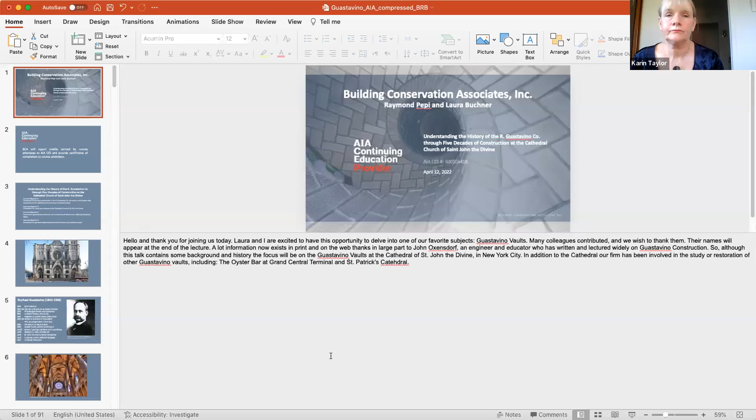Laura and I are excited to have this opportunity to delve into one of our favorite subjects, Guastavino vaults. Many colleagues have contributed to our knowledge over the years, and we wish to thank them, first of all. Their names will appear at the end of the lecture. A lot of information now exists in print and on the web, thanks in large part to John Ochsendorf, an engineer and educator who has written and lectured widely on Guastavino construction.

So although this talk contains some background and history, the focus will be on the Guastavino vaults at the Cathedral of St. John the Divine in New York City. In addition to the cathedral, our firm has been involved in the study or restoration of other Guastavino vaults, including the Oyster Bar at Grand Central Terminal and St. Patrick's Cathedral.

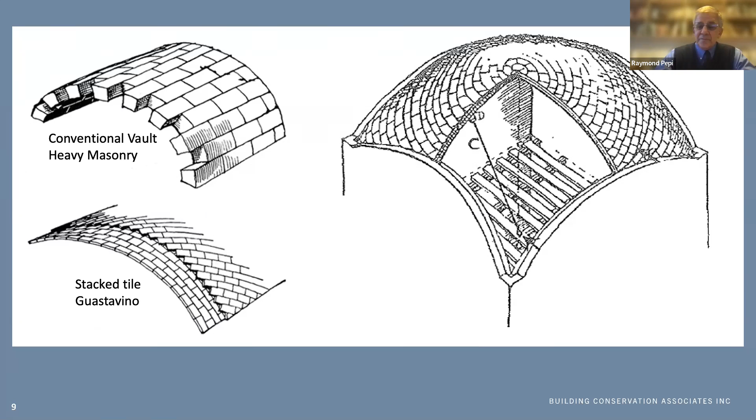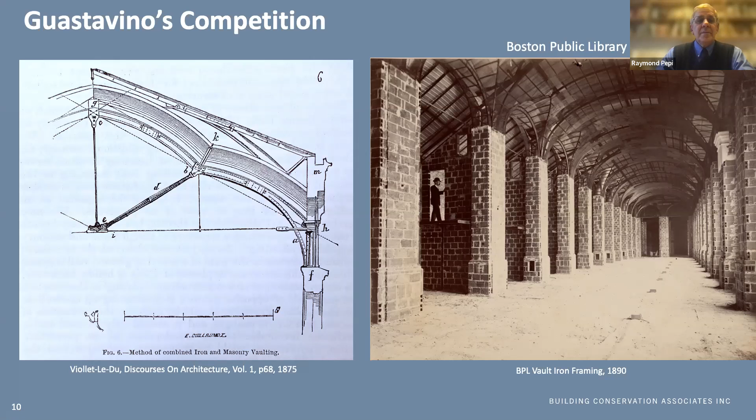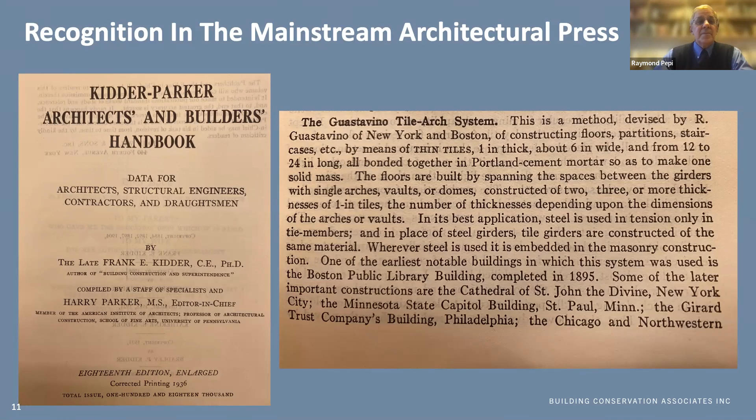By the 1930s, the Guastavino tile arch system was recognized in the mainstream press for all its advantages. This blurb in the fireproof chapter of Kidder Parker basically recommends contacting the Guastavino company, acknowledging it as the sole source of Guastavino vaults. In the same chapter, Kidder Parker provides other composite systems, steel and terracotta or brick for floor arches, but does not mention Guastavino's potential for domes or circular vaults of all sizes and shapes. The age of steel and concrete were overwhelming Guastavino's quaint tile system already in the 1930s.

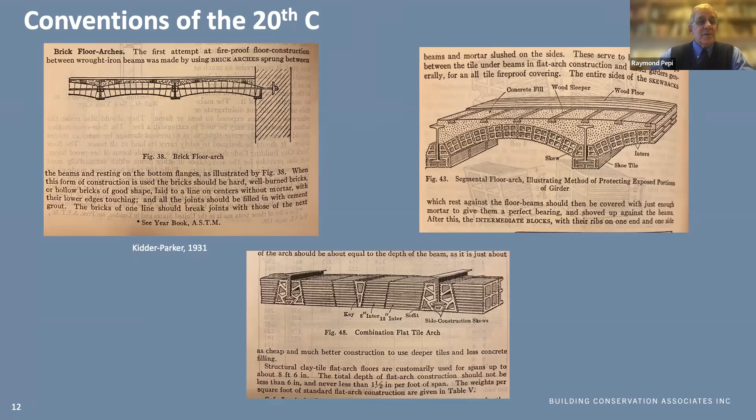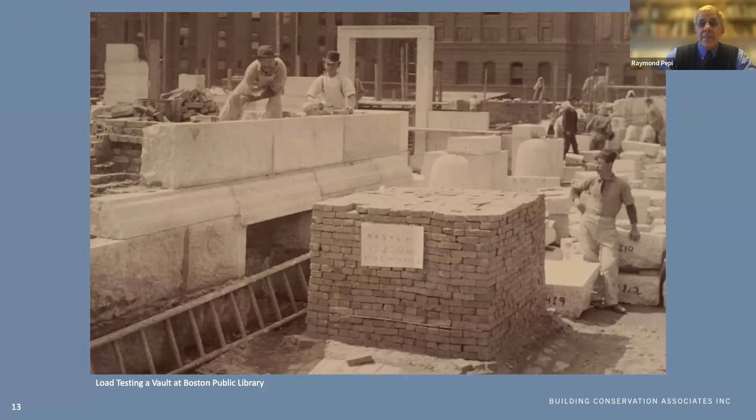Until the Boston Public Library Commission, all of Guastavino's vaults were plastered over and painted on the underside. Here at BPL, for the first time, he developed a system for decorating the exposed soffits of the vaults using glazed and unglazed tile in geometric patterns. He worked a lot of this out with the architect, but it was a very successful enterprise. Reflecting the importance of fire protection, the company was incorporated as the Guastavino Fireproof Construction Company.

Rafael Sr. gained increased attention and notoriety when he presented the first of two lectures at MIT, and his second was in early 1890. These were later published as a monograph in 1892 called Essay on the Theory and History of Cohesive Construction, a term that he employed. By 1892, the company had opened offices in New York, Boston, Providence, and Chicago.

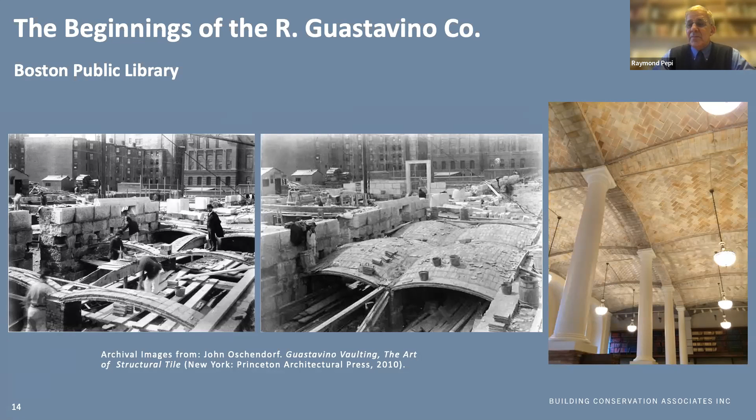Guastavino was becoming closely associated with the City Beautiful movement in Beaux-Arts architecture and architects. Due to the 1893 economic depression, the company was forced to reorganize, and in 1897 it became the R. Guastavino Company, with Rafael Jr. named as vice president, as he was gaining vast experience and capability. In the early 1900s, his dad, Rafael Sr., went into semi-retirement, and Jr. took over operation of the firm and did very well with it, equally as important as his father.

Although Guastavino's tiles could be installed without centering, it's clear from this photo at the Boston Public Library that sections were temporarily supported with wood templates. Perhaps not in every case, but in many cases. These also served to maintain the desired radius and were apparently moved along as the tile set.

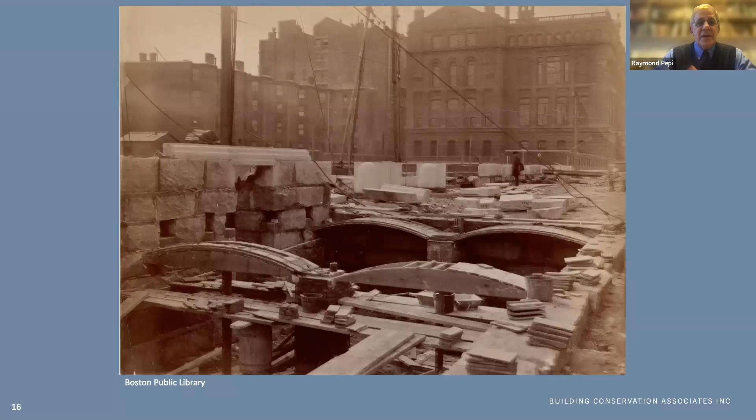These wood patterns could be removed before the vault was completed, unlike a conventional vault. Here are a couple of other photos that show in the foreground the wood templates, and in the background the Guastavino vaults that were constructed based on their radius. And here's another one where the wood template is engaged and the tile is still sitting on top of the wood template. So they would just remove a section and slide it along until they got the radius correct.

Guastavino received a patent in 1891 for a system of constructing vaults using thin tiles. This patent drawing clearly shows no need for false work and how the system is distinct from conventional arches, where, unlike Guastavino's system of laying tile in a flat orientation, the brick is laid up in a vertical position. That's in the lower image, and the upper image is Guastavino's system.

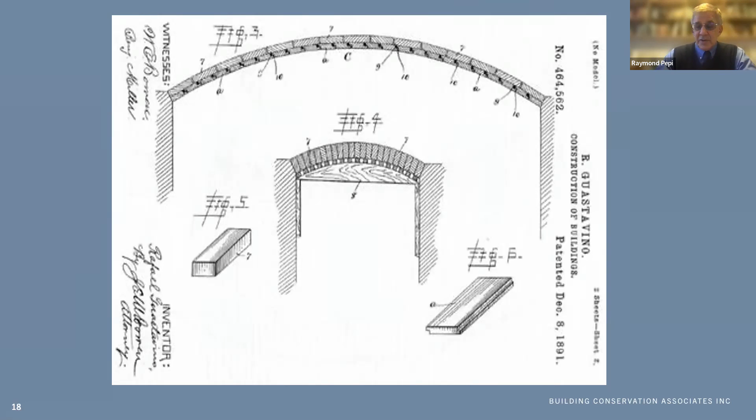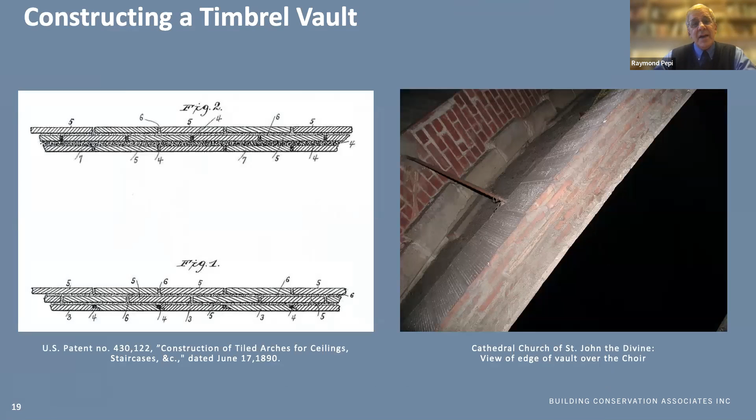The tiles were assembled in layers with fast drying mortar to create monolithic assemblies. You can see that in the diagram, and in the right photograph, on edge, you're looking at a profile of the multi-layered tile in an arch. The Guastavino company published elaborate details, such as this page from the 1929 Sweet's catalog that's in BCA's library, as it happens. But because of the patent he held a virtual monopoly on the vaulting system.

There is a wealth of information in this cut sheet, notably that the vault could be built under a concrete floor. See the blue arrow, and the red arrow illustrates the use of dwarf walls, suggestive of the construction system above the Oyster Bar in Grand Central Terminal, supporting the original waiting room marble floor. So in the right series, you can see the red arrow pointing down, and below it is a shop drawing from the original construction drawn by Guastavino. So that is the position of the vaults underneath the waiting room floor.

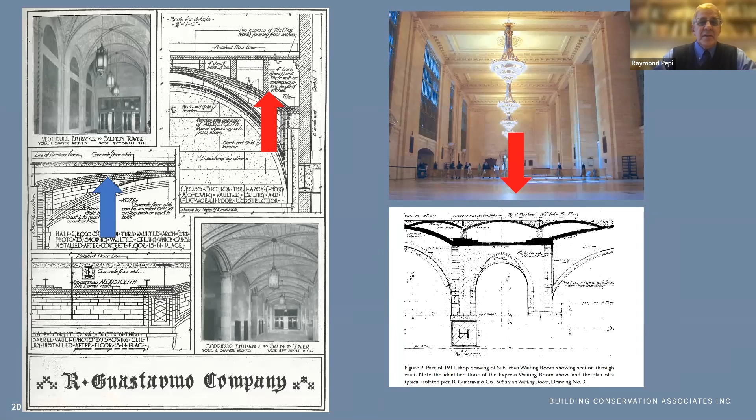For those of us in New York City, examples are not hard to find of Guastavino vaults. In fact, once you become familiar with the form, they seem to be everywhere. Recognizable by the herringbone pattern, low profile, relatively flat profile in some cases, and spanning large areas without any visible means of support, with the tile serving as the finish of the structure.

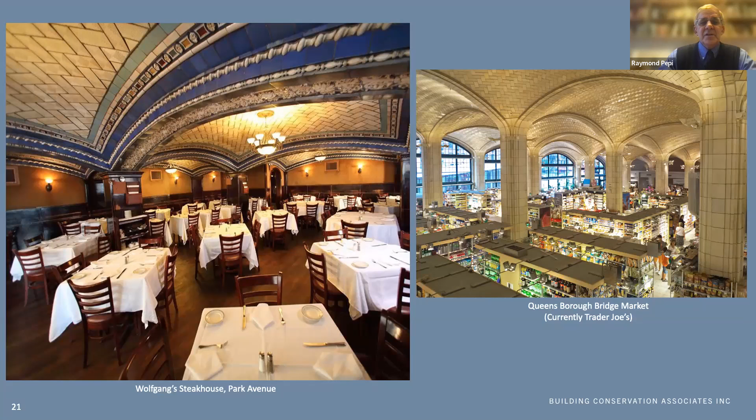So no need for painting or plastering. The tile is part of the structural system, and the last bottom layer of tile can be used as a decorative tile. The left image is of a steakhouse on 34th Street, and the right image is of the Queensboro Bridge Market.

The architect for New York's first subway was Heins and LaFarge, who were also the original architects for St. John the Divine. August Belmont, a financier, was head of the subway and a patron of St. John the Divine, and hence there is a connection there, which Laura will describe in greater detail in a moment.

The subway, which ran north from the City Hall station, was completed in 1903. It's under City Hall Park and was referred to as a subterranean cathedral, consisting almost entirely of polychrome Guastavino vaults and stained glass, all designed to elevate and overcome anticipated public resistance to traveling in underground tunnels.

The station survives to this day and is still used as the loop turnaround for the number 6 train before it starts on its journey uptown. But the station is sadly not visible to the riding public, though the conductors have a view of this magnificent station every time they drive the train through it to turn it around to go uptown.

More views of the City Hall subway. The left slide shows an unresolved detail, since you can see the arch tile on edge, and it's a little bit rough. The slide on the right shows the tile cross-section consisting of 5 layers supporting masonry above. Both of these are at City Hall.

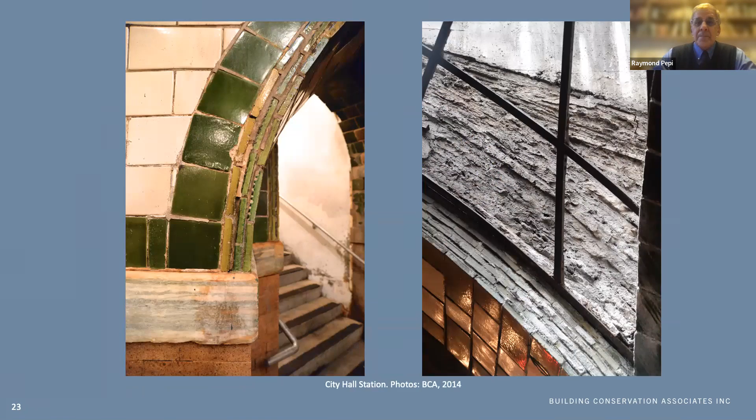The Cathedral of St. John the Divine is famous for its size and for not being completed. In fact, the Guastavino dome, which is a masterpiece of 20th century masonry vault construction, was intended as a temporary solution for covering the large crossing until a final spire could be constructed.

This poses a preservation conundrum for future generations, since the dome is now a character-defining feature of the church. In the meantime, its preservation is of utmost importance, and an investigation of the dome by BCA, Silman engineers, and Ennead architects is currently underway. Laura will tell you more about this in a moment.

The Guastavino company is gone, but contractors have figured out how to reconstruct tile vaults when necessary. Here you can see two missing severies at St. Patrick's Cathedral in a vault underneath the Lady Chapel. It's part of the crypt, but it was built around 1905.

So it was an addition to St. Patrick's Cathedral, but nonetheless, it was a Guastavino vault. During the most recent restoration, which we were very much involved in, there was a need to remove a couple of the severies for structural purposes to support something above it, and it had to be reconstructed.

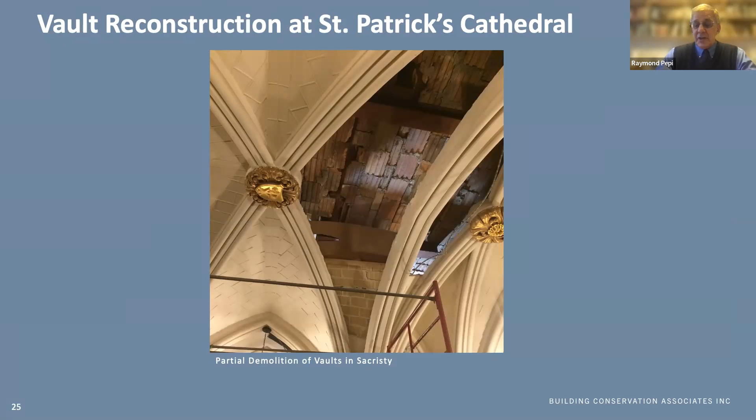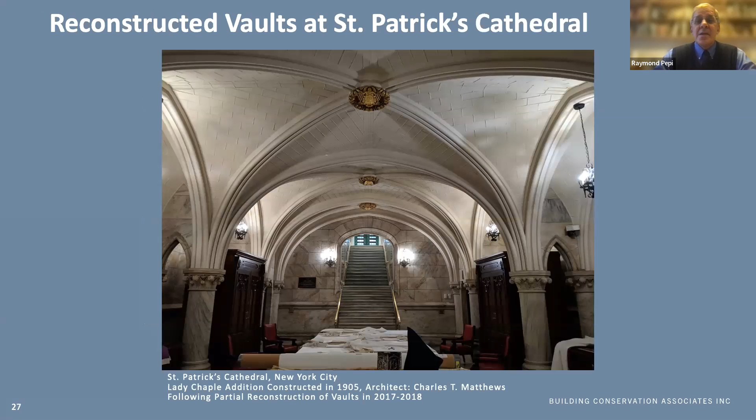This is the space underneath the Lady Chapel at St. Patrick's. The vault soffits were finished with glazed tile, but over the years, Guastavino utilized a number of finishes to decorate their vaults, including those shown here. Also shown at the top left is a portion of an unglazed red tile used for construction of the structural vault, to which finished tile were applied.

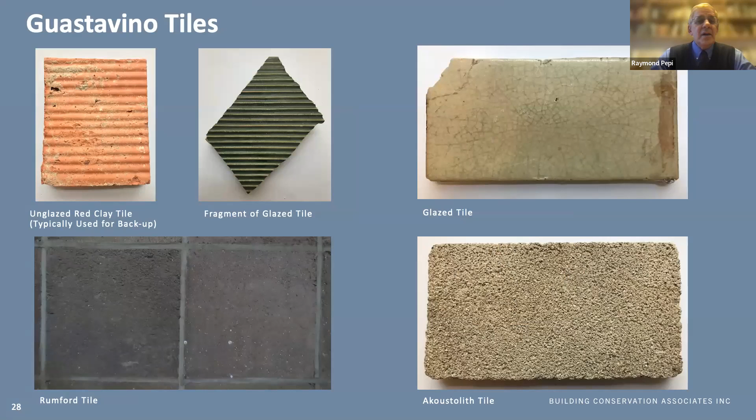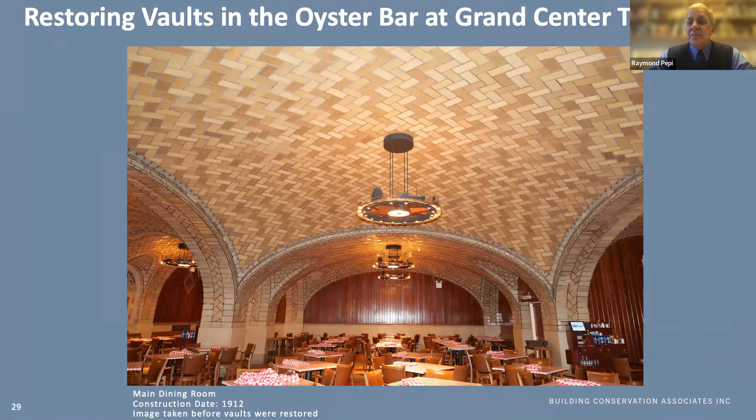Before turning to the cathedral, let's take a quick look at how vaults at the Oyster Bar at Grand Central and the Whispering Gallery right next to it were restored in 2013 and 14 under our direction. The restoration was precipitated by isolated areas of mortar having fallen out over the years. As a result of a comprehensive inspection, the tile needed to be either repointed, anchored, or reset.

The Oyster Bar is a magnificent space and still an active restaurant. It is in the lower part of Grand Central Terminal. You can see the blue arrow pointing to about where it is.

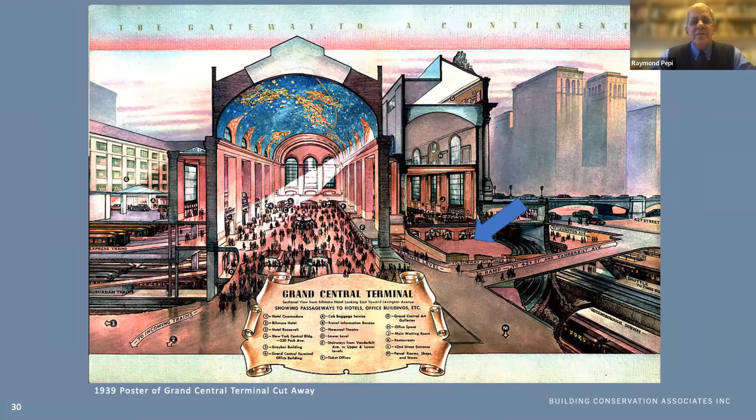So this is a cutaway looking east, and 42nd Street is on the right. Here is the entrance to the Oyster Bar in an area that's called the Whispering Gallery. If you stand in one squinch, one corner on the left or the right, and whisper, someone 50 feet away in an opposing squinch can actually hear you.

This was unintended, but is now a major tourist attraction. So when it became necessary to replace most of the outer tile in the Whispering Gallery, great care was taken to recreate every aspect of the original: the tile density, the size, thickness, mortar, etc. And the curious sound effects were indeed preserved along with the Guastavino vaults.

Comprehensive sounding of each tile was the technique used to identify loose tile. Here is an image where a few tiles were removed before the restoration. Now if you follow the red arrow in the upper right diagram as I click through the sequence, it'll be very helpful to understand what's going on.

The soffit tile was the first layer of the vault that was assembled. These were bound together using a soft white mortar shown by the white arrows. So the lower tile was installed first, and then bound together with a gypsum plaster, which set very quickly. Then above it, the rest of the tile were installed. So I'm going to cycle through it now.

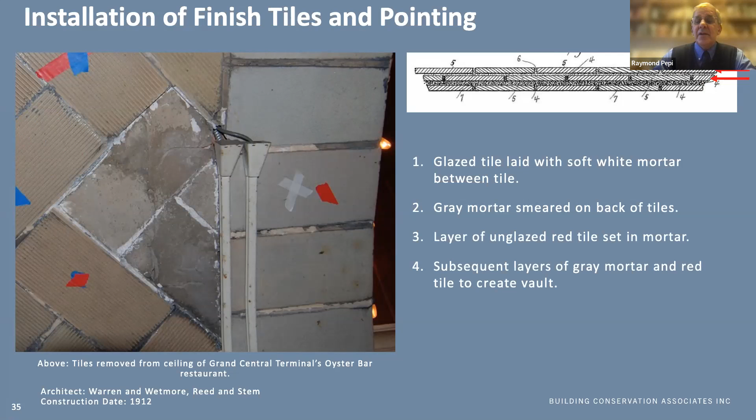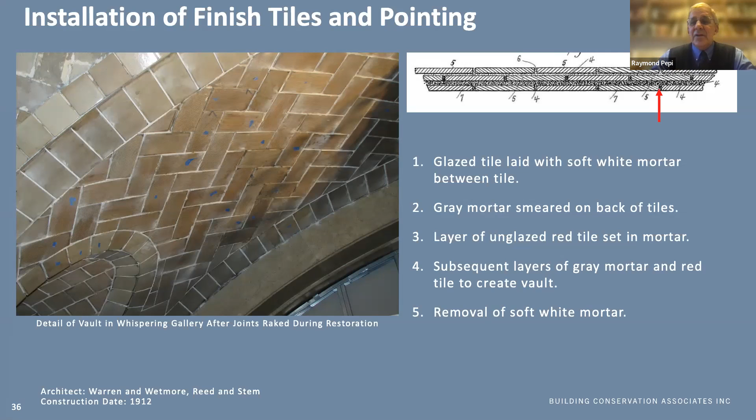After construction of the vaults, the soft white mortar we started with between the tiles was cut back in preparation for the final mortar, a ribbon mortar, which sticks out from the surface a little bit. On the left, you can see an area of tile after the soft mortar was removed during the restoration.

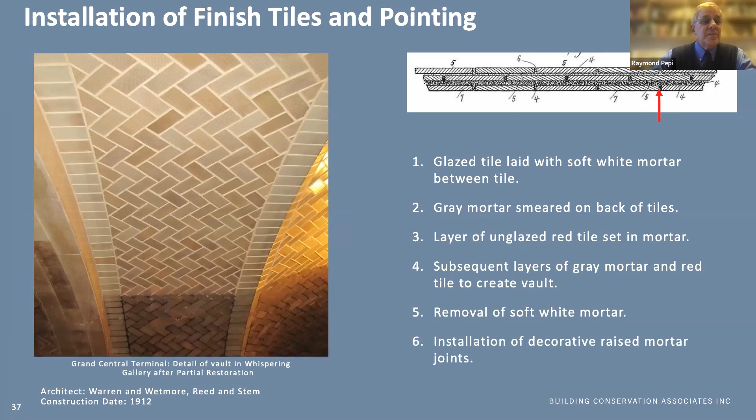A tan-colored raised mortar joint was then installed for our restoration. Note the dark areas waiting to be restored at the bottom. So it's like a little bit of a before and after.

Here is a close-up of a vault partially repointed during the work. At the bottom of the image, you can see tiles not yet pointed. A raised or ribbon joint - notice that the tiles don't have perfect registration next to each other because it's flat tile being installed on a convex or concave surface. So the ribbon joint, which sticks down a little bit, is essentially a method to disguise the inevitable misregistration of flat tile laid on a curved surface, and it works.

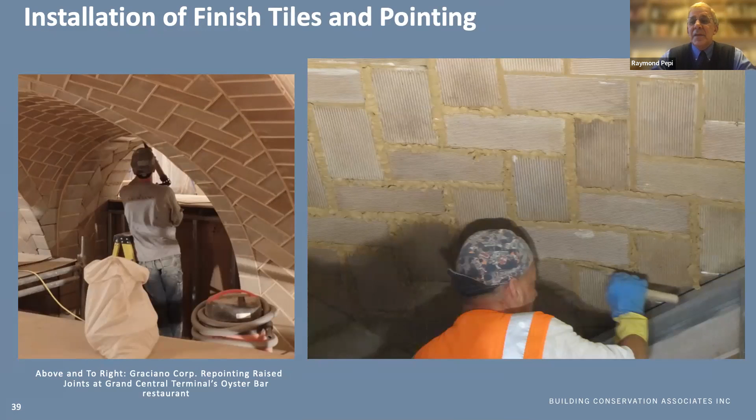This image shows the mortar being installed, the final pointing mortar, the ribbon mortar. It remains unclear how Guastavino installed the mortar, but we suspect a similar method achieved the same aesthetic effect, as the workers filled the joints with mortar using a caulking gun and then a special tool for striking the surface.

When the mortar was sufficiently set, the excess was cleaned up from the surface of the tiles to form a nice clean profile, which you can see at the top of this image. The finished product, what appears to be a smooth and continuously curved surface affected by the ribbon joints, is shown here. This is a restored part of a whispering gallery.

So that's a quick description of Guastavino and how to repair it. So now it's my pleasure to hand off the second part of this talk to Laura Buchner, who is a senior conservator and project manager at BCA.

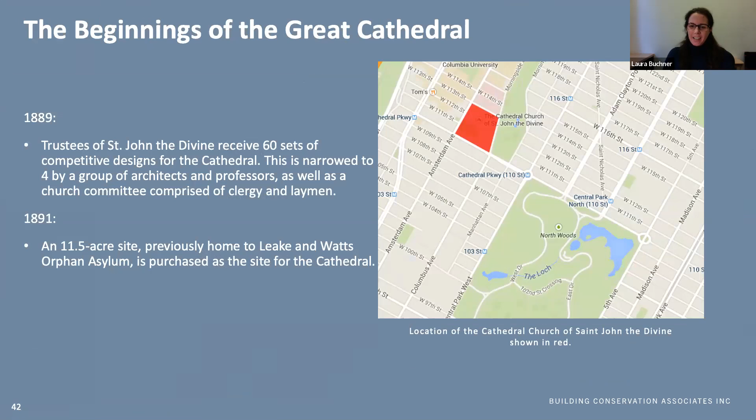Laura? Hi, thanks, Ray. So talking about the Guastavino at St. John's and focusing on that now, what's impressive about it at this site is not only the sheer quantity of it, which is really remarkable. Essentially, Guastavino tile is found throughout the entire floor and the entire ceiling of the cathedral practically.

But it's also really fascinating to look at this site because as the construction evolved at the cathedral and the design evolved, it also mirrors some of the evolution of the company. So we'll start back with the cathedral in 1889, which is the year the Boston Public Library was constructed. So this is happening concurrently.

They're just really starting off in this country. The cathedral received 60 sets of competitive designs, narrowed down to 4. All of these designs had Gothic traits, but none was really purely Gothic. The winner of the competition for the design was the firm Heins and LaFarge. They were selected in 1891, the same year that an 11.5 acre site for the cathedral was purchased, located between 110th and 113th Street, Amsterdam Avenue, and Morningside Drive. You see it highlighted in red on the screen.

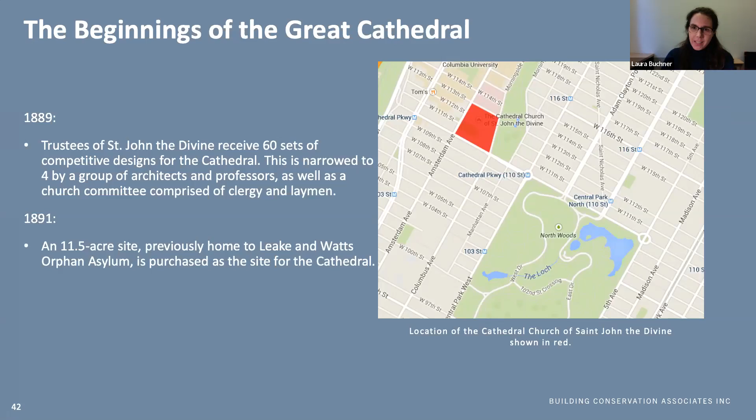Now, although the exterior of the Heins and LaFarge design was English Gothic, the interior was really rooted in Byzantine domed churches. They had a design description that discussed at length their reasons for including domes and rounded arches rather than Gothic style vaults. They noted that very few churches in the United States actually had real stone Gothic vaults. Most were just painted plaster to imitate stone, which they just didn't feel was in keeping with the philosophy of Gothic architects. If you want to see a beautiful example of this sort of thing, you can go back to St. Patrick's, which has the beautiful painted plaster faux stone.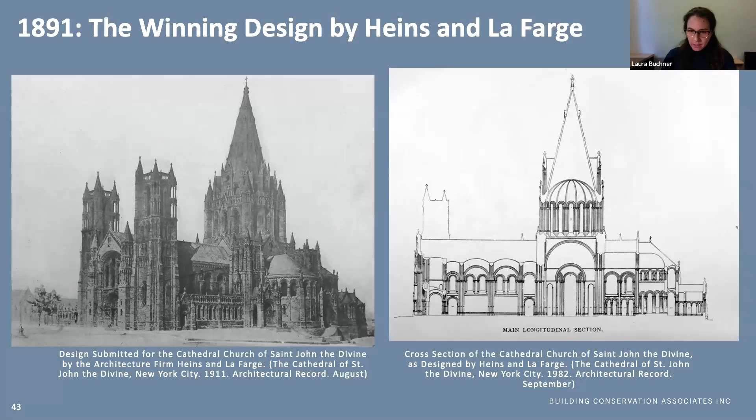Instead, they were advocating to construct with what they referred to as tile arch construction. They didn't actually use the word Guastavino anywhere in their description, but that's really what it was. They wrote, it consists of building an arch of tiles laid at right angles to the radius of the arch. This method, although only lately made available in this country through the importation of workmen familiar with its use, is one of highest antiquity. The flat tiles of which it is built overlap each other like scales of a fish, and being laid in cement, form practically a homogeneous mass, which exercises practically no thrust on its supports.

They explained that using this tile construction would allow the piers and the buttresses to be made less massive, which would of course be an economic savings. Similarly, the tile vaults could be lighter and easier to build than using traditional stone Gothic vaults. They went on to note that the interior of these surfaces could be decorated with any degree of elaborateness. Their intent was to use colorful tiles and mosaic finishes.

It is interesting to note that they additionally described Gothic vaults as discontinuous by design. They're broken up by projecting ribs that carry the stones. And with the tile arch construction, the strength of it was really considered to lie in large continuous surfaces. So they reasoned that this method was best used for tunnel vaults and domes with pendentives, like you see in the design here, rather than Gothic vaults. And as you'll see over time, obviously Guastavino's construction was used to construct many other Gothic vaults.

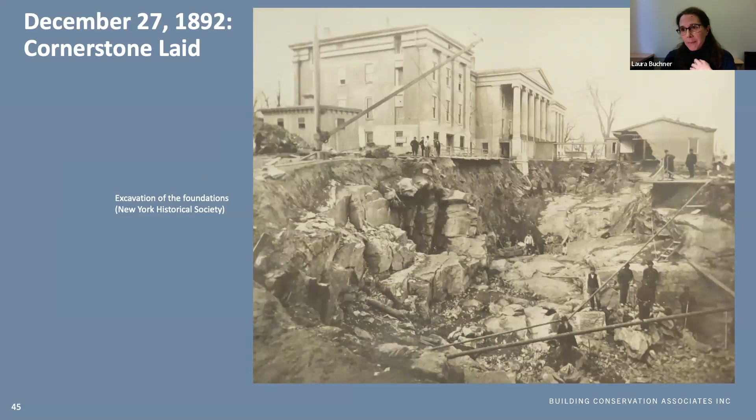But the cathedral's first cornerstone was laid in 1892. Excavation for the foundations proved difficult though. In some areas, they had to dig over 70 feet for solid rock.

By October 1898, Guastavino was at work though at the cathedral, constructing the crypt vaults. They formed a chapel, which was used for the first services on site in January 1899. The vault space here was about 18 feet high, about 100 feet wide and 70 feet long. And the services were held here in the crypt without interruption until the choir and crossing above opened in 1911.

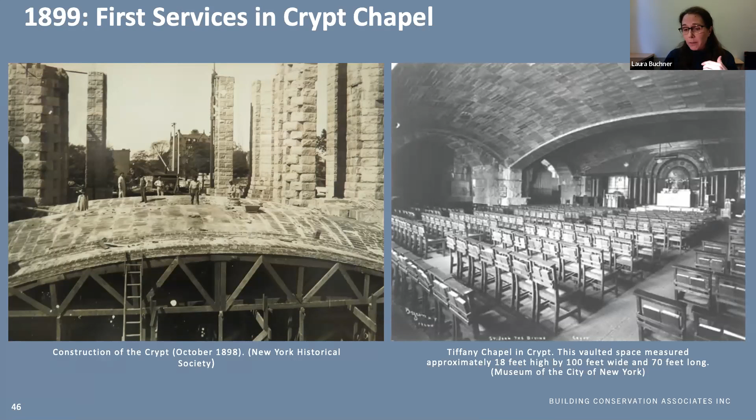Guastavino Sr. initially constructed with tile that he purchased from others, but pretty early on, he became frustrated with securing reliable, affordable tiles. So in 1899, he submitted a patent for improvements in kilns for glazing and enameling clays. And then in 1900, the company began manufacturing their own tiles in Woburn, Massachusetts. That enabled them to explore new colors and patterns.

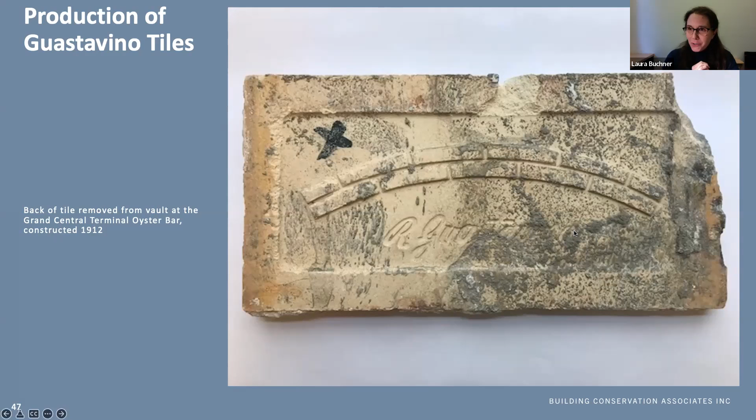You see one of the Guastavino tiles here on the screen, which is actually removed from the Oyster Bar. Not all tiles they made have this background design in which you can see the arch across the top and their name on the back of it. It's always kind of a treasure when you get to find one of these. But just an example of their product.

Now, not long after opening their factory, Guastavino began working on the first of 2 apsidal chapels at St. John the Divine. So there are 7 chapels that wrap the east end of the choir, and they're referred to as the Chapel of the Tongues. Each chapel is dedicated to a different saint that represents a major population coming through Ellis Island at the time. So the far east chapel in the center is Saint Saviour, highlighted on the screen.

This has groin vaults that are decorated with glazed yellow and green tile. You can see here at the top, the apse over the altar with these beautiful gold mosaics. The chapel here also exhibits those decorative raised mortar joints that Ray was mentioning. Guastavino Company first employed those on their vaults in 1905 elsewhere.

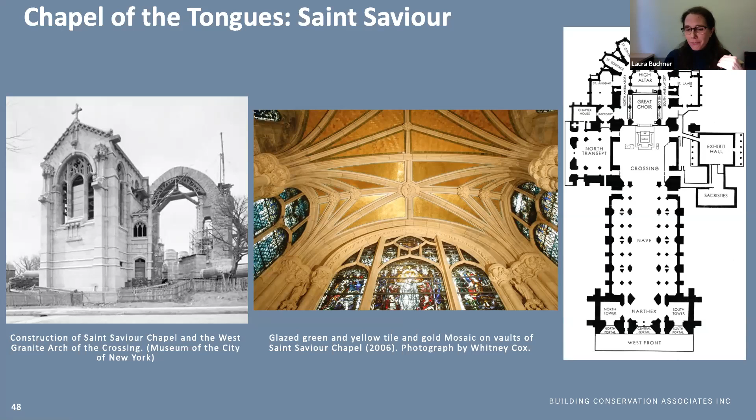Ray mentioned a connection to City Hall. To give context of what was being constructed at the same time by the company: St. Saviour was donated by August Belmont, who headed the consortium building the subway. The first tile order for St. Saviour was placed on November 13th, 1901, just 5 days after the order for the City Hall subway station. Company records indicate the green glaze ordered for both is the same, which is just a fun connection.

The second chapel built by Guastavino is St. Columba, highlighted in red on the screen. This was built later than St. Saviour. The first order for tiles was in 1906, but both chapels were consecrated on April 19th, 1911. The ceiling of St. Columba is comprised of vaults with a more traditional plaster finish, except again over the altar, which has those beautiful mosaics. Both St. Saviour and St. Columba, in addition to having ceilings by Guastavino, had roof structures constructed by the company.

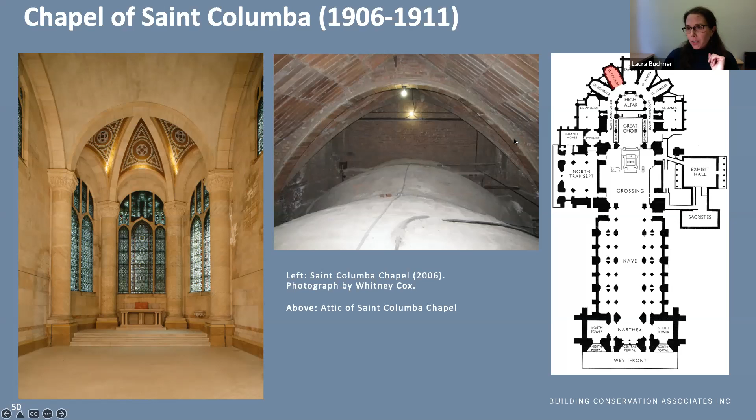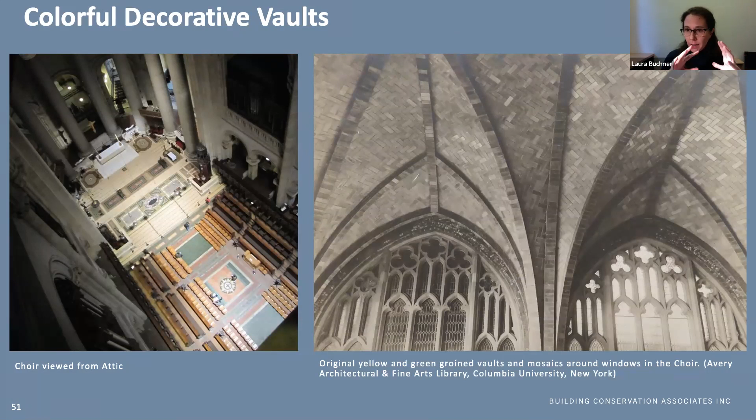Heins and La Farge's overall design for the cathedral was really intended to showcase mosaics and tapestries, various marbles, and colorful floor tiles. You get that sense looking at the finishes for those two chapels, as well as the floor of the choir here. The original ceiling in the choir area also had yellow and green soffit tiles.

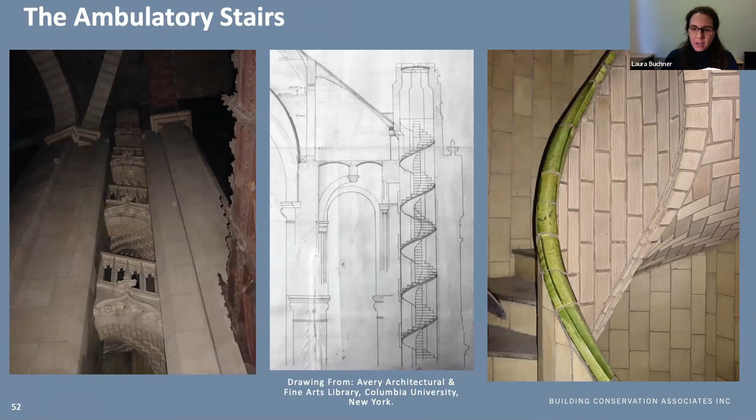You have these beautiful staircases in the ambulatory that rise the full height of the choir. They don't have a central axis. These stairs by Guastavino are also quite remarkable, again with that colorful tile.

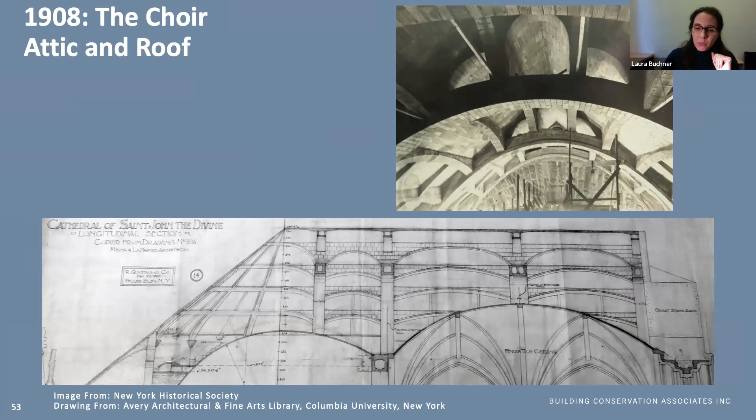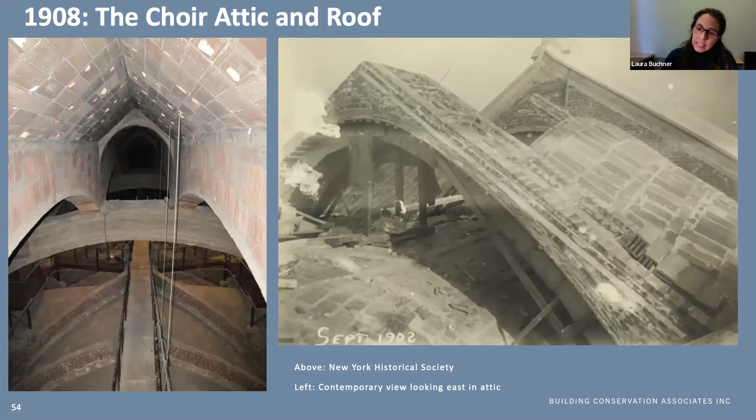Above the choir, Guastavino is also responsible for the attic, the roof structure. They built the arches that spring above to form that roof, which was constructed with hollow box sections of tiles. The safety of the roof design was verified using a method called graphic statics, an analytical technique regularly employed by engineers by the year 1900.

Guastavino Jr. had first learned graphic statics while constructing the nearby St. Paul's Chapel at Columbia University, completed in 1907. The use of this technique was employed in future constructions, including the dome of the crossing at St. John's. In February 1908, Rafael Sr. passed away. In 1909, the next year, Guastavino Jr. was responsible for building what is the largest dome ever built by the company.

It rises 161 feet, 2 inches. The granite arches were first constructed, and then the tile dome was constructed without any falsework support. You see wood templates, as Ray mentioned, but no supports underneath. There was a scaffold built on the outside of the dome that helped support materials, essentially just for mixing. The workmen themselves were supported on the tile they were constructing.

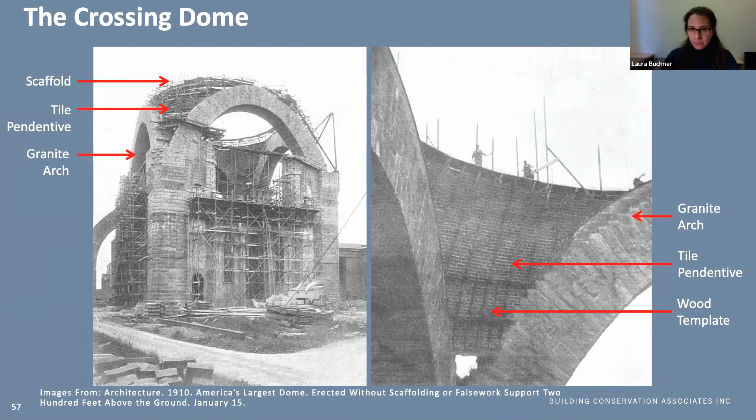Thinking back to that explanation Ray gave about how the vaults at Grand Central were built—that first layer being tile put together with a fast-drying white mortar—that was done here too, with subsequent layers built above it. Looking at an interior of this dome, think of each ring of tiles as a course. In one day, 3 courses of tile, so 3 rings, were constructed. At the base of the dome, it's 9 tiles thick, about 12 inches. At the very apex, it's only 3 tiles thick, about 3 3/4 inches at the very top.

The productivity of laying just 3 courses a day was dictated by the fact that 3 courses is about 18 inches, which is about as far as someone can reach out over the edge of the dome, lying on top of their previous day's work safely. At the beginning, there was a large work crew to get the thick tiles and large rings done. By the time they got to the top, they only needed about 4 masons. They could easily finish in 8 hours, then just had to wait until the next day for it to support them.

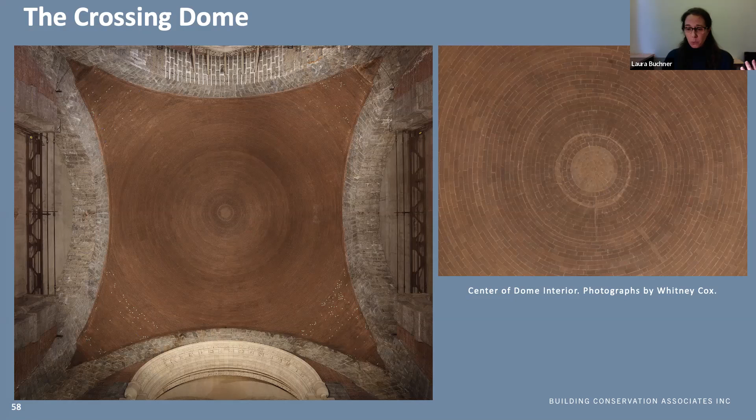Then a vertical bolt at the center of the plate was connected to a steel rope that had a heavy weight hanging from it that was placed at the very center of the dome. And that was confirmed at the center of the dome once or twice a week. Then you had additional wires extending up from the plate, and those were moved along with the templates in order to maintain that radius. This is reportedly the first dome in which the company integrated steel bars between the courses.

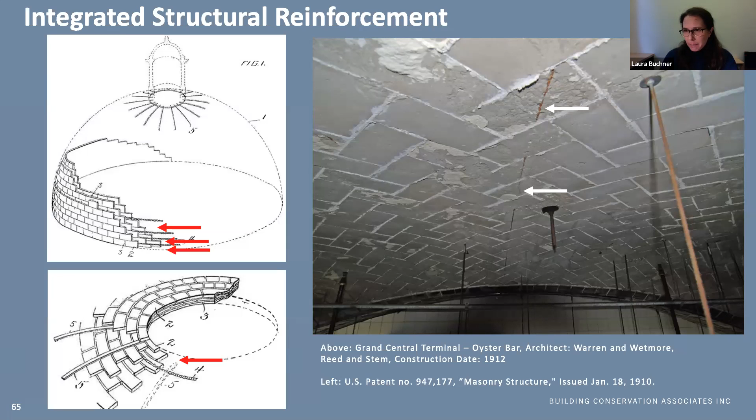You see on the right actually an image from the Oyster Bar kitchen where in 1997 a fire there had the tiles removed. And you see above that the steel reinforcement embedded in the mortar above, which is an example of this. Now, it just took 15 weeks to construct the dome at St. John's. The work was said to be completed without accident. Only 1 or 2 tiles fell. The pendentives, which are this triangular portion here, those pendentives were constructed in 5 weeks, and everything above the arches here was constructed in just 10 weeks.

The work garnered substantial media attention, as you can imagine. At the time, it cost $10,300 to construct, which would be equivalent to about $321,000 now. We talked to one of the preeminent restoration contractors in the country and asked them how much they thought it would take, and they said at least $10 million to build now for them. So really quite the bargain. The dome was warranted for 10 years.

About 7 years after its construction, it required its first repairs when a survey showed that the dome had started to flatten. So Guastavino had it bound on the exterior with some iron bands. In 1927, it needed netting installed underneath due to small bits of mortar falling. In 1937, Guastavino did some additional repairs to the pendentives. Despite the need for these interventions and other maintenance, this temporary roof has been in place for over 100 years.

The most recent intervention was the installation of a new copper roof, recently completed. If you visit the cathedral now, you'd see a large scaffold in the crossing for an interior restoration of the dome that's about to commence. Now, by 1911, the first services were held in that crossing and apse. On the screen, you see the section that was built by 1911. That was designed by Heins and LaFarge. By that point, Heins had actually passed away.

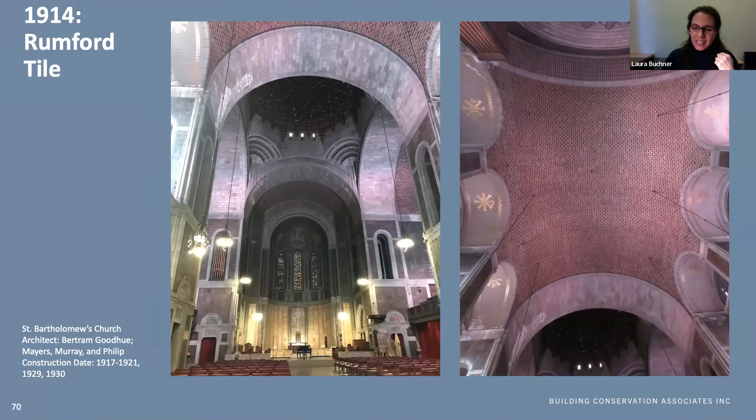So Sabine and Guastavino's first invention was Rumford tile, which was patented in 1914. You see it on the screen here at St. Bartholomew's Church in New York. Here's some detail images of those tiles on the ceiling; it's really quite beautiful. They have these gold insets in the joints.

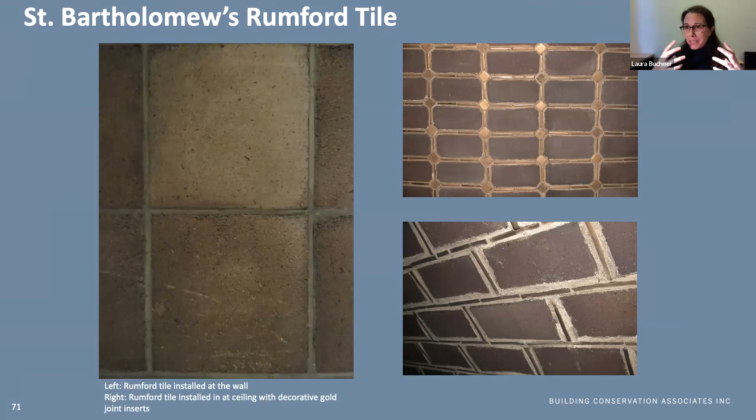Rumford tiles were a kiln tile. So they were produced with a mixture of clay and peat. And then when it was fired, the peat would burn out and it would leave behind these voids that create this sponge-like material with these chambers that absorb sound.

Now, Rumford tiles were advertised well into the 1920s, but it was actually Sabine and Guastavino's second iteration of acoustical tile that outsold them. In 1916, they patented what was dubbed Akoustolith. In addition to having a higher sound absorption coefficient than the Rumford tile, Akoustolith was superior because it was a cast stone product. Now, Rumford tile, because it was kiln fired, was less consistent. The irregular shapes and sizes and sound absorption coefficients couldn't be produced consistently as that material would burn away.

But Akoustolith tile, the way it was made was that you had sand that was sieved, so it was all really graded to the same size. And then the particles were bound together with just enough cement and water, just barely to touch them. And that created this interlocking pore system that would then absorb the sound. And if you adjusted the size of the sand, you would change the size of the pores between the grains, and that allowed you to change what the acoustical properties were.

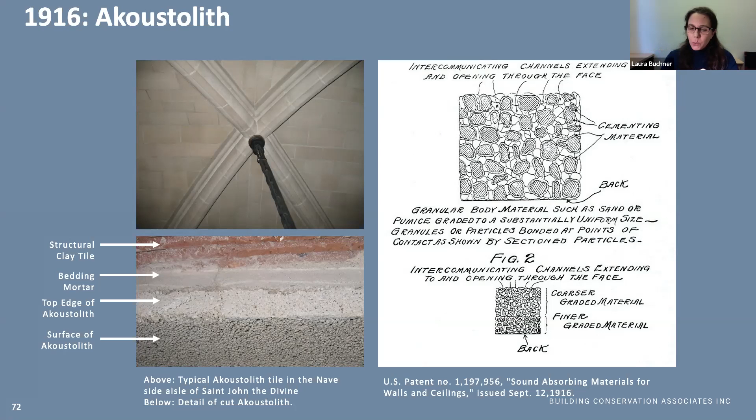This ended up being incorporated into train stations and swimming pools, theaters, factories, and it was instrumental in Cram's design for St. John's. The same year that the Akoustolith was patented, ground was broken for the cathedral. The nave that you see, the Guastavino vaults were constructed to support the entire floor of the nave. And then World War I interrupted fundraising. And it stood, as you see it on the left of the screen, until 1925, and then began to rise above the floor.

The vaults continued to be integrated into Cram's design because they embodied his ideology for Gothic style, this concept of a load-bearing masonry construction that was free of steel, and therefore consistent with the methods used during the medieval era. The footprint for that existing crossing dictated his design for the nave. So originally the cathedral was meant to be 500 feet long, and in order to keep the proportions for the Gothic cathedral that he wanted, he actually lengthened the cathedral to 601 feet, which, if you need a reference point, think of as 2 football fields and a football.

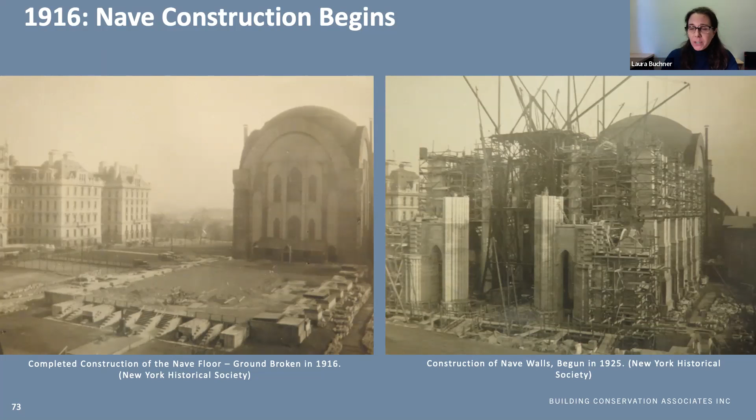The French Gothic style in particular was chosen to match the massive size and loftiness of it. The nave and transepts were designed on grids of squares, again, to maintain the proportions he was looking for. Each of the squares of the nave is a sexpartite vault. You see these 6 severies. The center of the nave soars to 124 feet. All of the ceiling of the nave is faced with Akoustolith tile. Wallace Sabine advised Cram on the acoustics, free of charge.

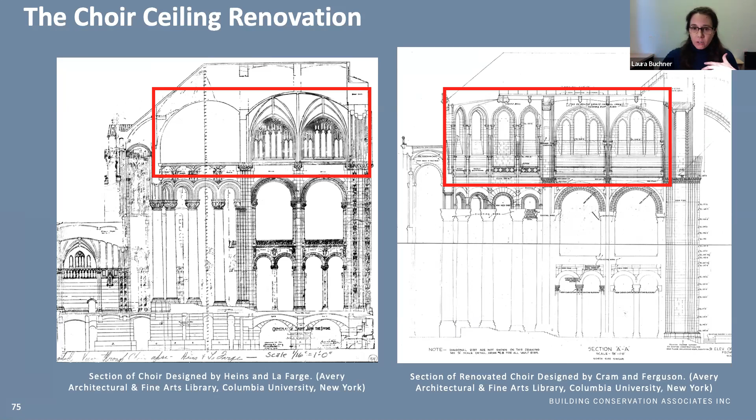By 1923, it had already been decided that they would renovate the Heins and LaFarge choir so that it would be more in harmony with this Gothic nave that was going to be constructed. So a temporary wall was put between the nave and the crossing. In 1939, the nave began to be used for services and the ceiling was renovated in the crossing, or sorry, rather in the choir.

The semi-dome at the end, which was to have mosaics, was removed and replaced with the 7-cell Gothic vault, which frames interior windows that are backlit. And then over the choir, there had been that red and green tile, which was changed out for these vaults. All of this was then lined with Akoustolith.

And it's really amazing when you look down that full length to realize that really the entire ceiling and the floor is Guastavino vaulting. The Guastavino company remained in business until 1962, but was in decline in the last 2 decades. In 1945, Rafael Jr. sold the company to Malcolm Blodgett, who was the company's treasurer and financial manager. In 1950, Rafael Jr. passed away.

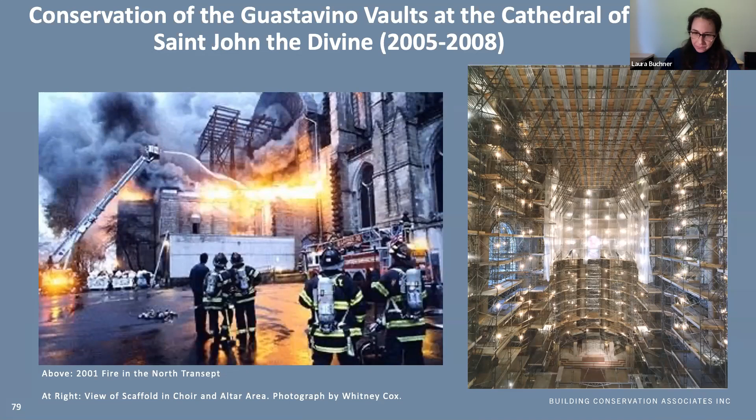So the first thing that was done was the cleaning of it. Because the material is so friable and absorptive, testing was done to determine appropriate product. Microabrasives, even soft media, would dislodge that sand and abrade that. Meanwhile, chemical cleaners would soak into the tiles and it would be difficult to actually get the chemicals out. So what we ended up using was a product called Arte Mundit, which is a latex spray applied product here, which was sprayed on, after it cures pulled off, and then the surface was scrubbed with some water to remove the dirt. And that helped to keep the material on the surface of the tile.

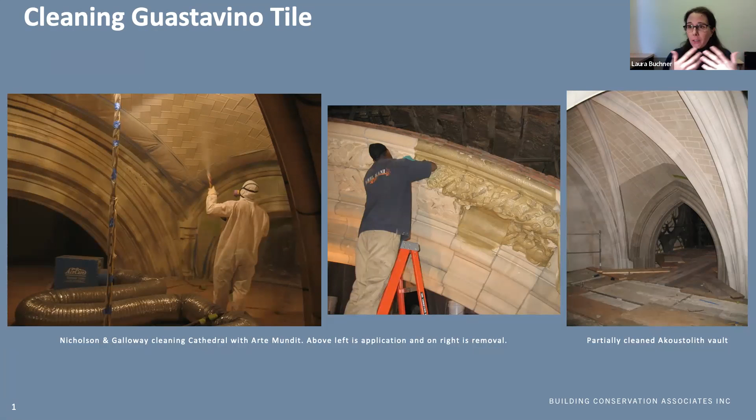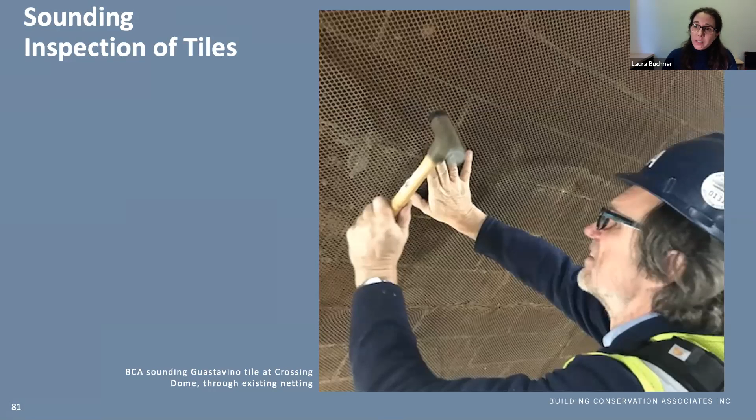After cleaning, we sounded the tile. And what that involves is really just tapping on the tile with a non-sparking dead blow hammer. And what we do is we feel for changes in the vibration of the tile, as well as listening for differences in sound in order to determine if there's any variation of the tile that could suggest some sort of debonding from the backup. And so this, as well as a survey of cracks, was performed. There was no history of any tile falling in the cathedral, but nevertheless, after documenting these conditions, there were some areas in which we decided to grout.

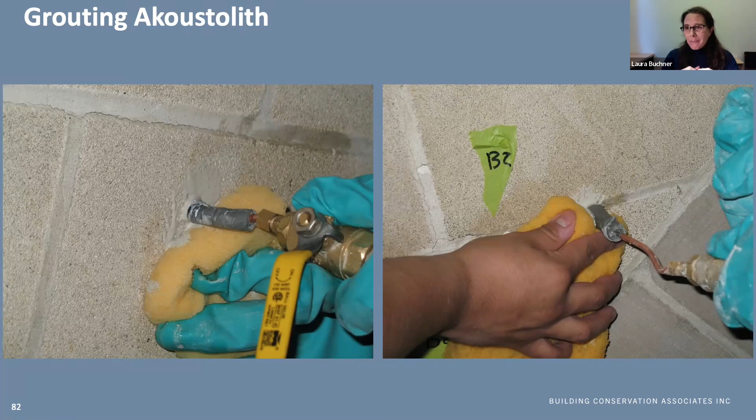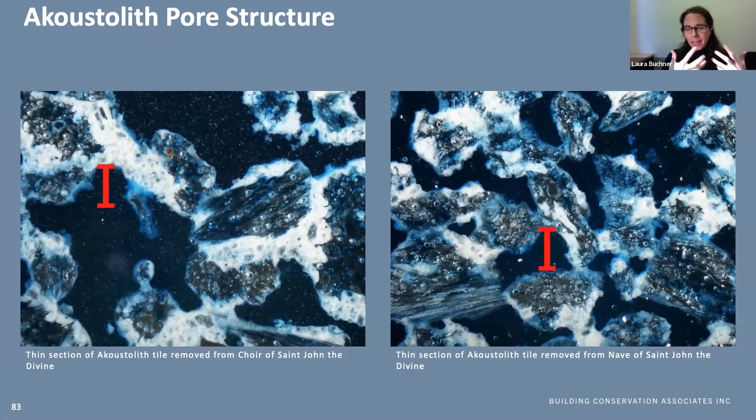We started off in the choir, and the tile was actually grouted using a cementitious grout. Afterwards, we sounded. Everything seemed much more stable. It all went really smoothly. And then about a year later, we went to the nave, and the material performed completely differently. It started to come out the face of the tile, and after we sounded, it wasn't working as well. So we did analysis of the two tiles in the choir and the nave, and we found actually that they had different size sand. As I mentioned, you could change the particles in the material to change the sound absorption coefficients, and that's what had been done. And the nave tiles actually had smaller sand, they had smaller pores, and we believe the capillary action was actually pulling that grout through.

So we changed to a different grout. We actually used a recipe that was developed by Morgan Phillips for adhering loose plaster to lath. And it's not available commercially at the time. It was actually mixed on site, but it's thixotropic. It would flow behind, but not out the face.

There were tiles that we had to replace. Akoustolith obviously isn't made anymore. But what we did was we went back to the 1916 patent, and BCA digested some of the tile in our lab. We matched the sand to a local sand that was well sieved, and then the contractor made new tiles on site, and we installed those with just, again, they just had sand, cement, water, a pigment, and then where large areas were put in, we used a potassium silicate tint to create some variation in color.

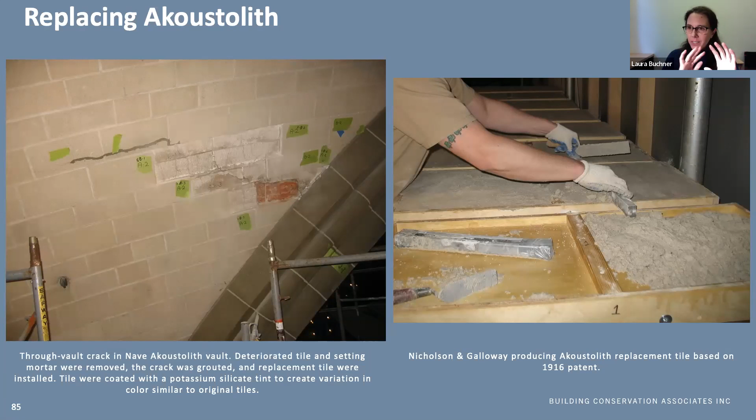Last thing I'll mention is the coating of Akoustolith. As I mentioned, it was used to get rid of reverberations. However, that's very frustrating for a lot of church musicians, so there's somewhat of a long tradition of coating these sorts of tiles by Guastavino.

In 1915, even before the nave of the cathedral had begun to be built, Bertram Goodhue had proposed putting a coating on some Rumford tile. Riverside Church in New York City sealed their tiles in the early 1950s and again in the 1990s.

Nevertheless, this is somewhat controversial in the preservation field, changing those acoustics. We want to be very mindful of not changing the appearance in any way. It's a very matte material that was used.

The original material was selected from a variety explored by the organ curator, Douglas Hunt, and he settled on an acrylic polymer. Once he had set what worked for the acoustical reasons, we then looked at it to make sure it wouldn't have any adverse impacts.

We evaluated its glass transition temperature. Essentially what we were concerned with is that because it gets really warm at the ceiling, we didn't want it to be tacky and have soiling sticking to it, or to start running and creeping on the surface. So we analyzed for that, and confirmed that would not be an issue.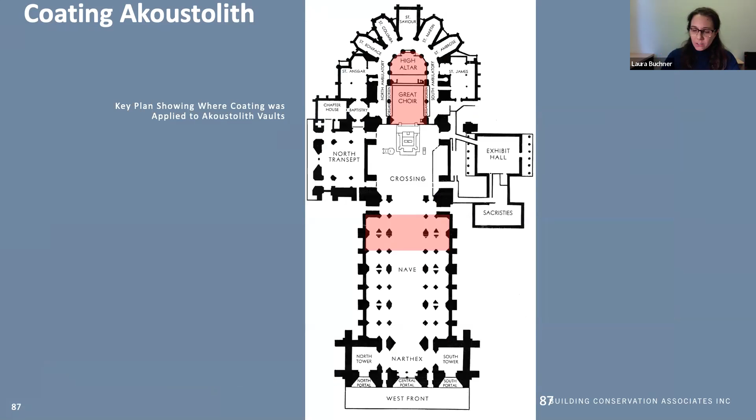So we've reached the end of today's presentation. I hope that this gives you a greater appreciation for the history of the Cathedral of St. John the Divine, as well as Guastavino construction.

I just want to leave you with one parting thought: if the design for the cathedral had been fully realized, as Heins and LaFarge envisioned it, it'd be very different. You'd have domes with all these glittering mosaics and colorful finished tile. And if it had been completed to Cram's specifications, it also looked very different than it does today, with that huge spire.

It would have had a volume of 16,822,000 cubic feet and a seating capacity of 15 to 20,000. Although neither of those really grand concepts fully came to fruition, it's in large part due to their relationship with the R. Guastavino Company that the extent of those monumental visions could really be realized.

Through the examination of materials at this cathedral, you're really able to see the remarkable evolution of the Guastavino Company and those technologies. So while their vaulting system is not only a dominating feature of the construction, we would contend that it's also the unifying feature between these different designs and this extended construction period.

I want to acknowledge the many people who have been involved in the various projects we described today, as well as some of the sources where we were able to glean so much of this wonderful information about the cathedral as well as Guastavino. Are there any questions?

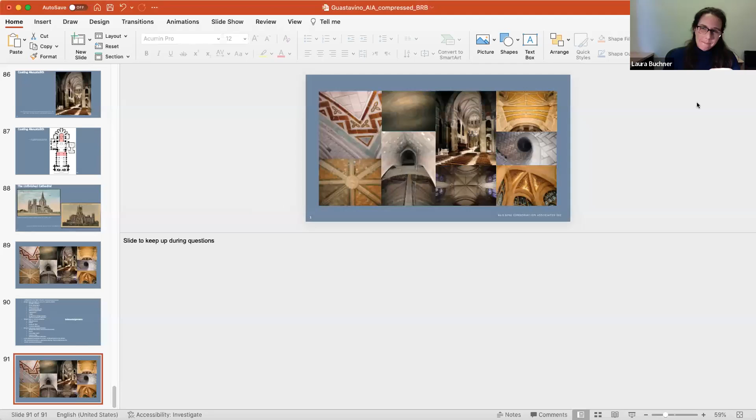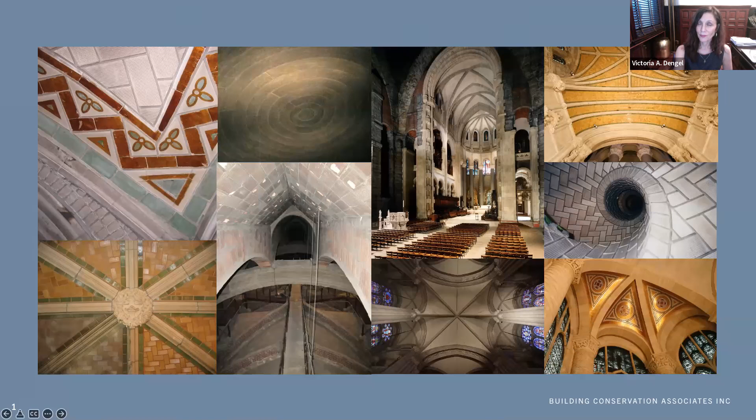This question is from Paul Napperstek: How long was the infinite corridor at MIT at the time St. John the Divine was built, which was declared to be the longest interior view in Christendom? I don't actually know the answer to that, but I'll have to check it out. That's a great question—I don't know.

There are always challenges whenever you say something is the longest or the biggest. There are certain dimensions where, for example, the Cathedral of St. John the Divine is the largest cathedral in the world, depending on how you measure it. So there are always challenges, but it's good to hear about those—we'll look into it.

What are the future plans for the cathedral? Do you know?

That's a great question, a little hard for me to answer since I'm not the rector or pastor there. But we've been involved there for well over 25 years, and I can tell you a couple of things. One is that the cathedral has always been committed to the preservation of the building itself—the fabric, as it's called, the structure and material—and that commitment to preservation has made our work that much more enjoyable over the decades.

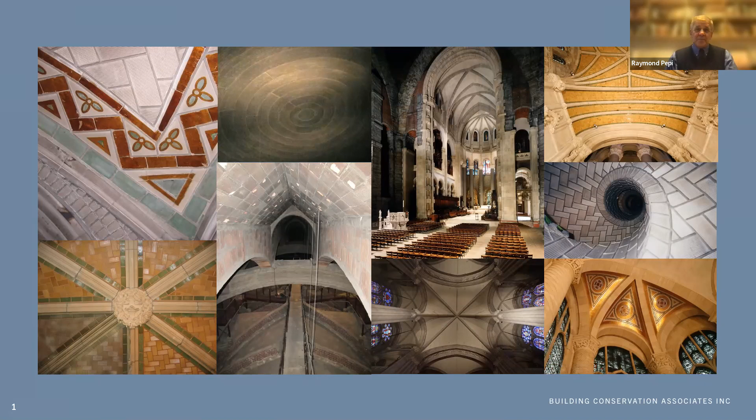The dome actually had two options considered for covering the crossing. One option was a steel frame. The reason it was built with Guastavino was because it was cheaper, and they didn't need scaffolding inside. So it was the cheapest option. Yeah.

Good question. We'll just take a couple more questions. Is the St. John the Divine dome the largest span of Guastavino tile? It is. It's their largest dome.

This is from Laura Ottersten. Out of restoring existing work, are timbrel vaults being built as part of new structures? She asks why.

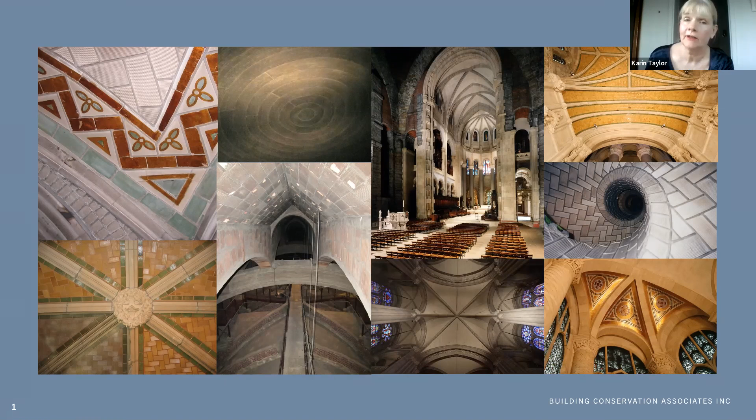It's interesting because there's a revival sometimes of traditional building materials like terracotta - there's been a recent revival in its use. For instance, at One Vanderbilt, the facade of the building is largely terracotta, which is amazing considering it's a tower in New York City. So there's still a lot of possibilities for Guastavino vaults to be installed, covering open areas and public spaces. Hopefully someone listening to this presentation will be inspired - an architect - to incorporate it into a new work in the future. There are masons who can build them, and we're pretty confident of that.

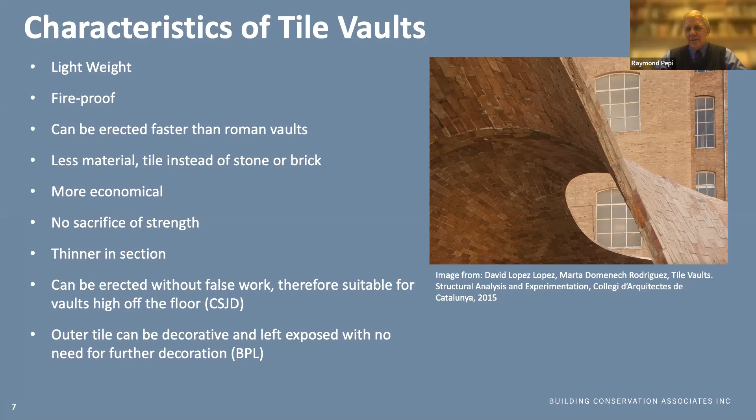I'll let Laura answer that question - she's the expert on Akoustolith. There were definitely variations with Akoustolith; they could change the properties by changing the sand. One of the patents actually shows that throughout the layer of a tile, the pore sizes change - I've never gotten to see a thin section of one of those tiles. So they had a lot of different variations, but the formula was generally the same, using a very consistent ratio of sand to cement and just enough water to bind it all together. That was very consistent.

As far as when we did the restoration, I don't know if this is what was being asked, but since we weren't trying to mimic the acoustical properties, we were really interested in the visual properties. The contractor actually made them slightly more dense to ensure curing of the material, but again, we had the visual aspect that we were going for.

Thank you, Laura. This question is from George Monasterio: what was the source of the fire at the cathedral, since all its masonry is non-combustible? Do you know what the cause was?

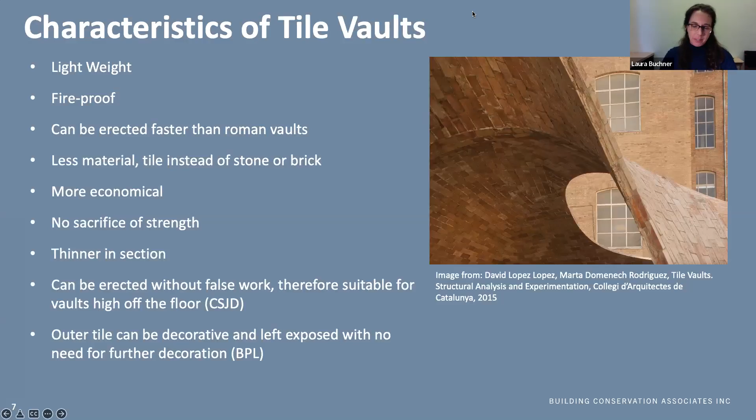Yes. The fire occurred in the north transept - let me quickly find that image, it'll make more sense looking at it. Because the cathedral was all masonry is why they were actually able to fight it back the way they did. This area of the north transept was constructed at the same time as the nave, but they had foundation issues again - it didn't rise as far, only getting to 40 feet. So when the cathedral fully opened, it was only about 40 feet high there.

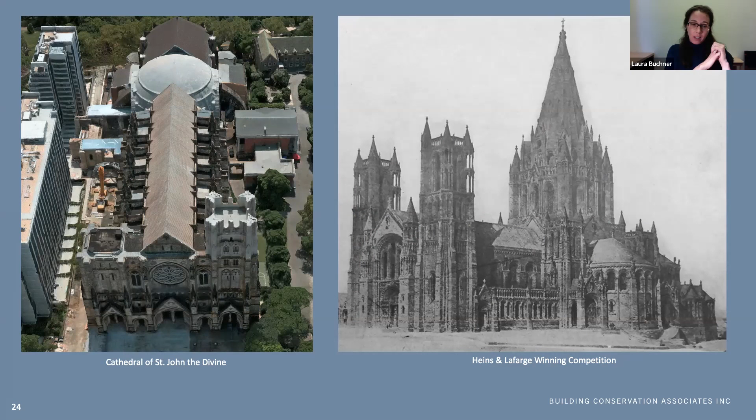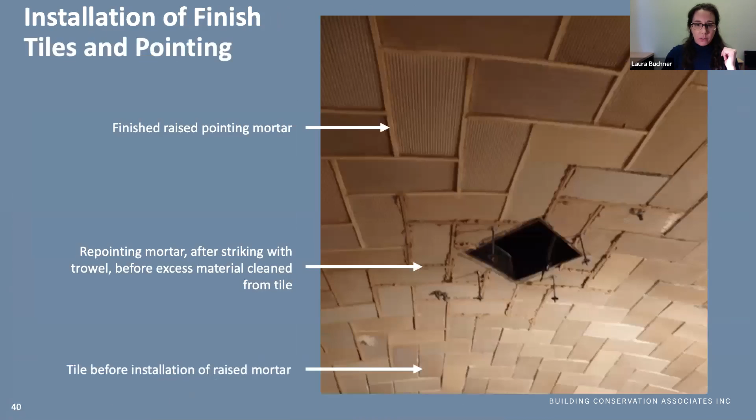Construction stopped again because of Pearl Harbor, so it just sat there. They ended up covering it with a temporary roof made of bitumen-covered wood. What happened was that in the very corner, an electrical strip essentially started the fire overnight. That roof then burned, broke through the windows of the crossing, and filled the entire cathedral with smoke.

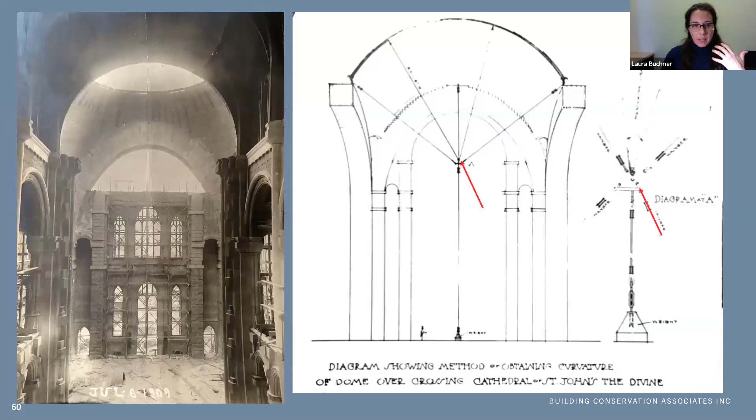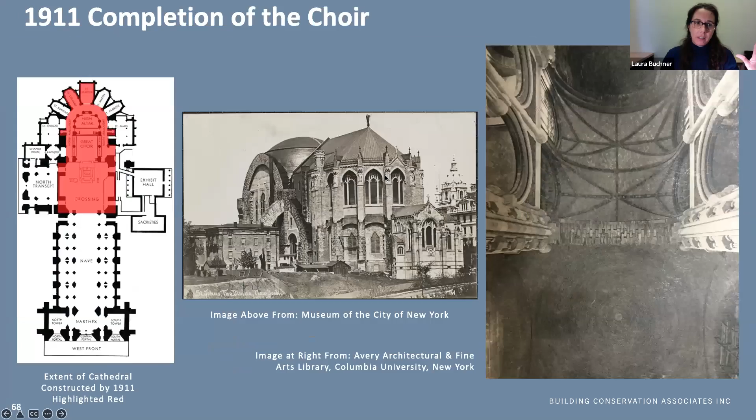It's amazing when you hear people talk about the firefighters coming in - they were able to go onto the crossing and actually fight the fire back from there, putting it out, but the entire cathedral filled with smoke. It was, in fact, that roof that really did all the burning. Because there are no pews in this area - sorry, it took a while, I had to flip quickly - but this is the roof that actually burnt.

This was the area that broke through these windows. They fought the fire back, but because this is all masonry, it really just needed to be cleaned. There wasn't damage to the actual structure, just this area.

The interesting thing is that firefighters had to fight the fire from inside the building itself, because the fire started essentially outside of the nave and broke through the windows. But the smoke, as Laura said, literally covered every square inch of the cathedral and found its way even to the top of the vaults.

If you recall the newspapers, it was actually just a few days before the fire in Notre Dame in Paris. There was another fire at St. John's in 2019 that was in the crypt, under St. Savior, which is that first chapel we mentioned. They were able to put it out relatively quickly. Nevertheless, the building filled with smoke, but it was underneath a Guastavino floor system, and those vaults, despite having the fire directly underneath it, were completely fine. So again, smoke being the issue, but really remarkable that they have this construction.

This will be our final question. This is from Rachel Killion: I'm interested in more information on the Guastavino firm. Can you point, Rachel, in the direction of any researcher or literature?